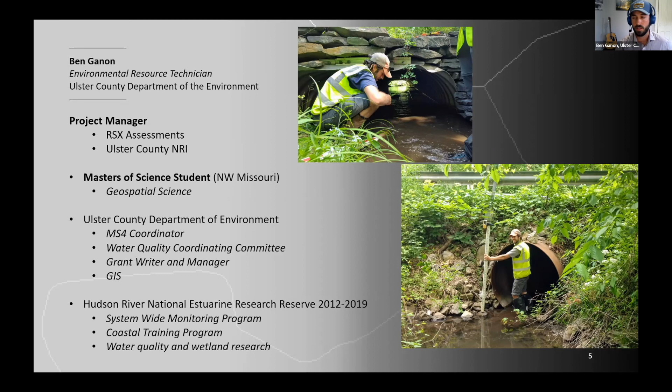I coordinate the county's MS4 program. I also co-coordinate the Water Quality Coordinating Committee. Our department is the county's water quality management agency. I write grants and manage those. I do a lot of work in GIS, and I come from a background in water quality monitoring. I did a lot of work on the Hudson River at the Hudson River National Estuarine Research Reserve.

All right, so just a quick primer on watersheds to set up the stream talk. Here we see the Rochester Creek draining into the Rondout watershed. Watersheds are defined by points, and at that point, all the area that drains to that point you could call a watershed. The watershed characteristics basically form the streams.

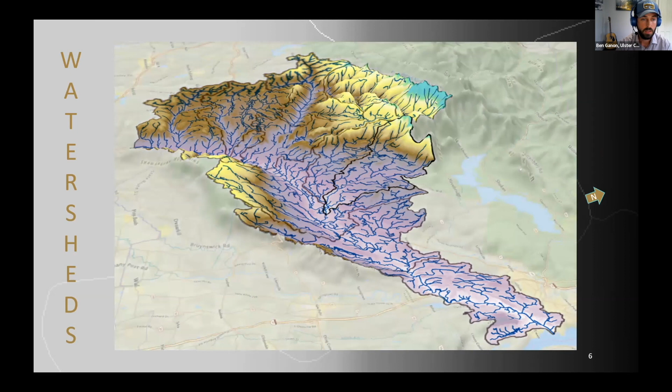Streams we like to look at as linear features. Streams are linear networks across the landscape, and as they flow, they interact with things. We can see here some streamlines on a map. We also see some roads—roads are also a very long linear network. And where they intersect, we have a road stream crossing.

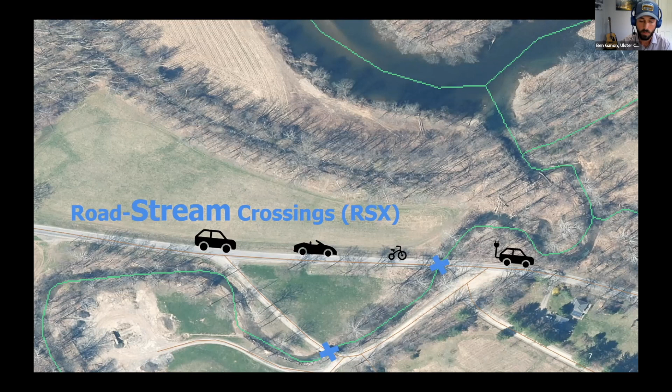They're everywhere. You're probably familiar with bridges and culverts. Before we move on, I did want to note a distinction because I also work on stormwater—there are differences between stormwater infrastructure and road stream crossings.

Stormwater infrastructure—also usually culverts, ditches, outfalls—is strictly for the purpose of channeling water away from impervious surfaces and into surface water, not streams. We get confused in the field all the time because they interact constantly, with stormwater draining into streams, and culverts everywhere, so it can be difficult figuring out what's what. I did want to make a note that we get questions all the time: if you're mapping culverts, what does that really look like?

Well, specifically for this talk and some of the projects I work on, we're talking about streams, and Tim will get into streams a little more.

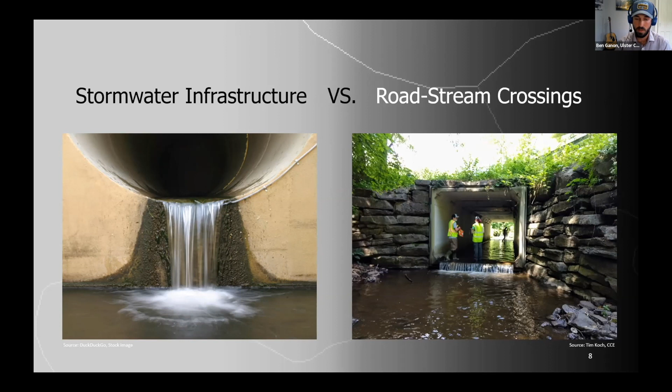All right, so road stream crossings—what's the big deal, why are they so important? Well, first of all, they're everywhere. There's an organization called NAACC, which predicts over 4,000 road stream crossings in Ulster County alone. This is a big deal because every road stream crossing can present a barrier to a stream. So picture 4,000 potential barriers to streams just in Ulster County—it paints a pretty bleak picture if everything is in bad shape.

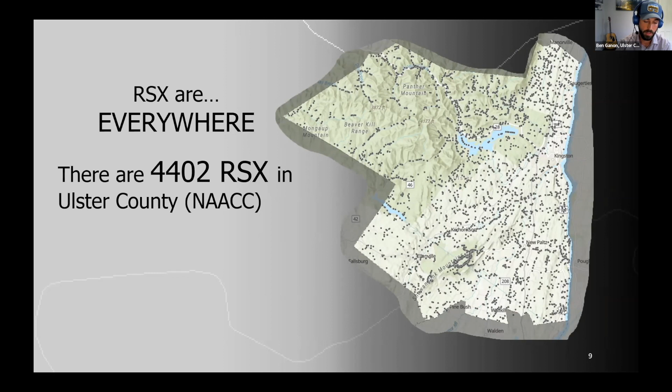So let's first talk a little bit about aquatic connectivity, which is that acronym on your screen—the North Atlantic Aquatic Connectivity Collaborative, one of the protocols Tim is going to talk about in a bit. I really like this photo because you can clearly see a stream, and the pipe in the foreground is supposed to funnel that entire stream across the road and continue it on its way. Here we see a big outlet drop, a very large scour pool, and a bunch of erosion.

I'm not going to steal Tim's thunder, but what this really does is create a big disconnect—all the upstream habitat is disconnected from the downstream habitat. That's a big deal for fish and other aquatic life, but it's also a big deal for terrestrial animals and critters that use stream banks as transportation corridors, which happens really frequently.

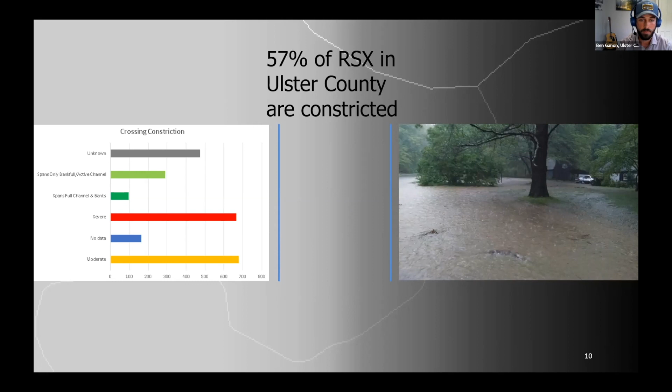Okay, so now that we know road stream crossings are everywhere, and we have a picture of why they're important for aquatic life, let's back it up a little more. Streams and road stream crossings really need to intersect, because road stream crossings are a conduit for flow, and when they're not passing water efficiently, they can serve as hydrologic plugs in the system.

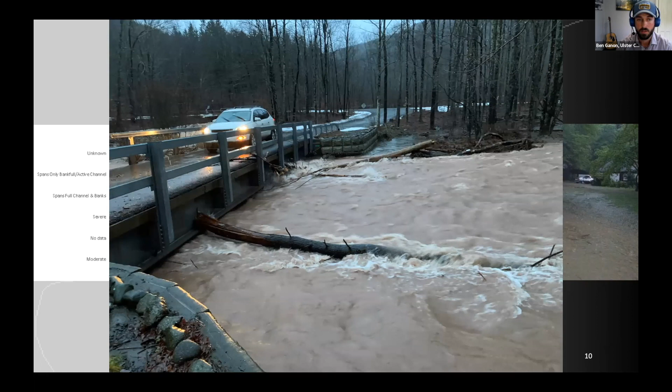You can see in this picture we have a pretty large bridge, but we can tell it's undersized. It's backwatering, which increases flooding upstream and also increases force on the structure and the road itself. This is no good because of climate change.

We're going to back up a little more before we dive into specifics, but let's talk about our changing climate—and climate change is a really complex topic.

The one relationship I want to talk about is heat and moisture. For every 1 degree Celsius increase in temperature, we see a 7% increase in water vapor availability in our atmosphere. That is the connection to larger storms in the future.

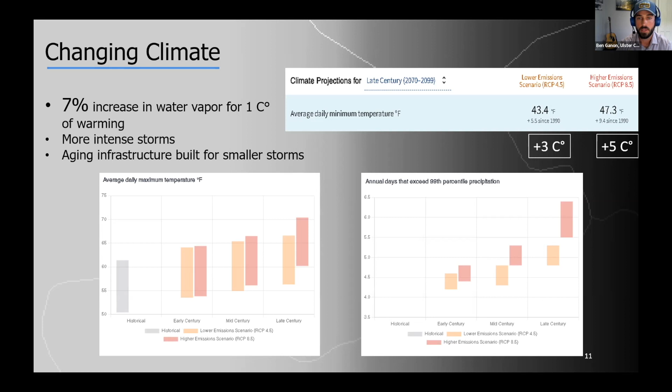When we have more intense storms, we have more rainfall, and our infrastructure is aging. It's undersized, built for storms much smaller than we typically saw in the past. This is a big deal because we're seeing the effects of climate change now, and climate change is all about pushing the extremes of what we know and what's the norm.

This is a fun graphic I pulled yesterday from some NOAA data. You can see that yesterday we had 15 million people under flood alerts, and at the same time, 114 million people experiencing drought. So we're pushing the extremes already.

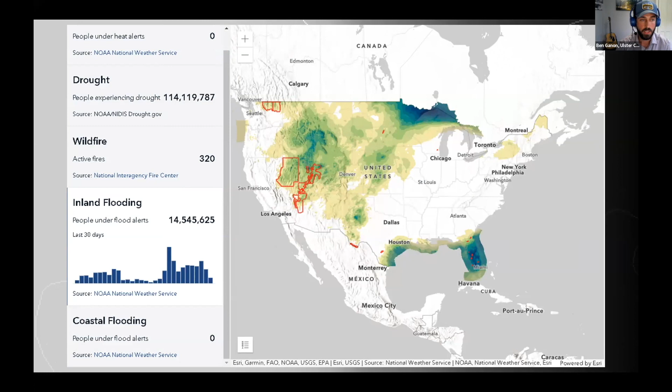When we think about our aging and undersized infrastructure combined with these more extreme climate events, we get what we all love to look at but kind of hate to see - carnage in our environment and our systems. Which is no good. It's a big threat to emergency responders, a big threat to human life, it's really disruptive, and it's bad for the environment. The list goes on and on.

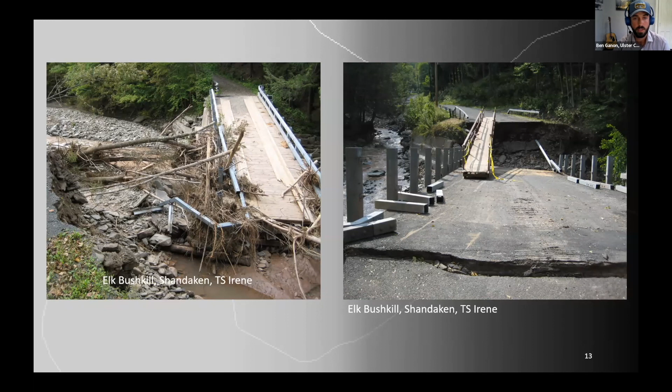This is Irene up in Shandaken. I'll go through one more example - this is up on County Route 47, just to get a sense of the scale of what we're talking about. You can see the culverts that were under that road, about 100 yards down into the woods.

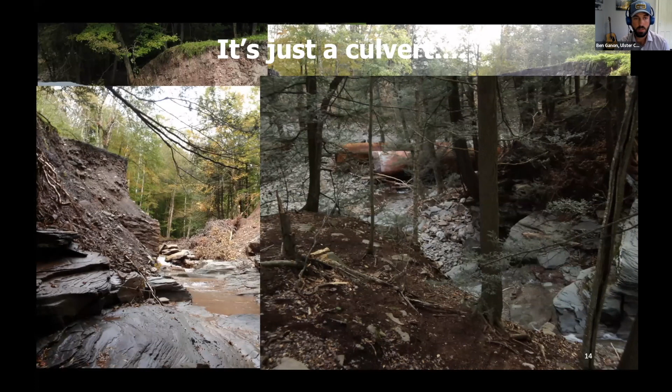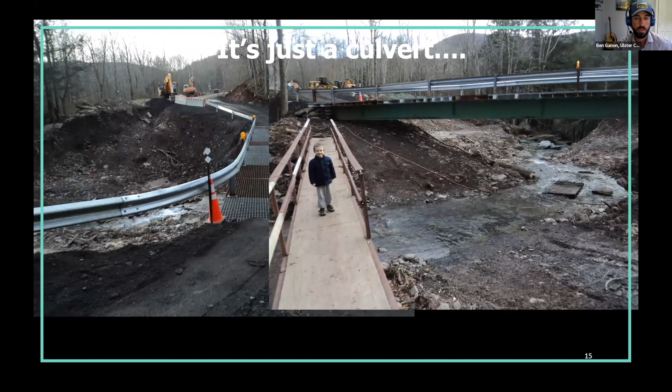It's really important for us to do this work so that moving forward, we can really begin to build and plan for future storms and the impacts we will see. This is the Cascade Brook Bridge that went in where that culvert was. You can see the impact, the size, and how well that would pass future flow.

That really gets back to my role and what we do, and what Tim does up in the watershed. At our level of work, at the county or watershed scale, we go out and try to get funding, and we go through a process where we assess and plan, and then try to design for the impacts we will see in the future.

These are the two big projects just in the last three years that I've managed. I've worked closely with Tim and a number of other partners, and we've received some good funding for these projects. But that's the overall picture I want to paint as far as importance, now and moving into the future.

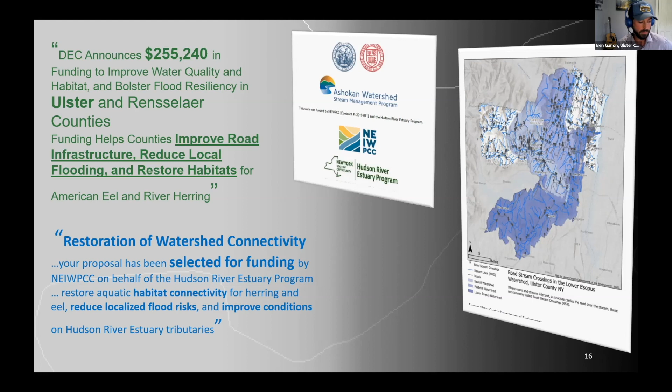I'll turn it over to Tim. Tim is the real culvert expert, so I'll let him take it from here. Bet you didn't know you could be an expert in culverts, but yeah.

Regarding some of this culvert work going on in Ulster County with Ben and the Department of Environment, my role is as a technical advisor. Ben is miles beyond me in terms of GIS capabilities, but I have a small niche, which is stream mapping and road stream crossing mapping that I've developed some methods for. So I help Ben with some of that.

The real meat of what I do is the field assessment methods, and we're going to get into some good detail on that in a little bit, and then how to take that assessment data and create scores and ultimately prioritization lists. There are 4,000 crossings in the county - where do you start?

Like Ben said, I've been doing this for a while. I did my master's research on road stream crossing mapping at SUNY ESF, did some work with the Nature Conservancy doing culvert assessments up in the Adirondacks, which was a great way to spend a year. Since 2018, I've been with the Ashokan Stream Management Program up in the New York City watershed portion of Ulster County. Since 2020, I've been working with Ben to take some of this expertise I've learned over the years and spread it throughout the county.

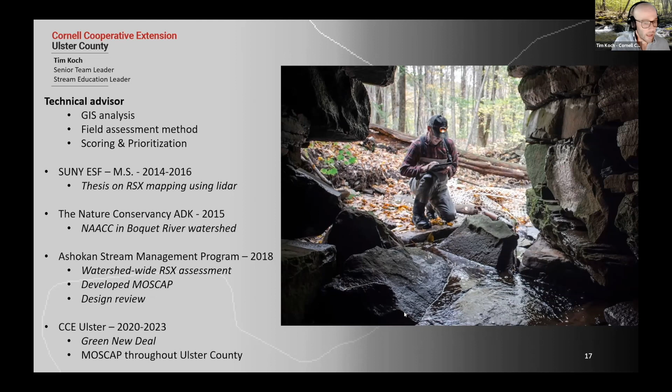And so Ben, you can go to the next slide. So this is really where I come in, is we have all of those culverts to assess. And so how do you do it? There's lots of different ways to look at culverts. There's lots of different things you could potentially measure.

So this MOSCAP is something I developed over the course of a couple of years. It was piloted up in the watershed, and then in 2020 started working with Ben. So like I said, it's sort of like this culvert management framework. There's a couple of different parts of it that start with that GIS work, like the image that Ben showed, predicting where these crossings happen. We have stream maps, we have road maps, we can kind of get a good guess as to how many crossings there are, where they are, how big they are, without ever leaving the office.

The big part of MOSCAP is once you do leave the office and you're in the field, it's a robust and holistic assessment method. So you're looking at a bunch of different aspects: aquatic organism passage, like Ben talked about; geomorphic compatibility, which we're going to talk more about in a little bit; the structural condition, so what is the physical condition of the crossing structure, whether it be a culvert or a bridge; and then this idea of flood flow capacity. So how much water can each structure pass, and is it enough? And is it enough in the face of climate change too? So we have a specific model that looks at that.

And then again, once all that data is collected, it presents a customizable prioritization framework. So depending on what your interests are and potentially where your funding is coming from, you can prioritize your culvert inventory in a way to match those objectives.

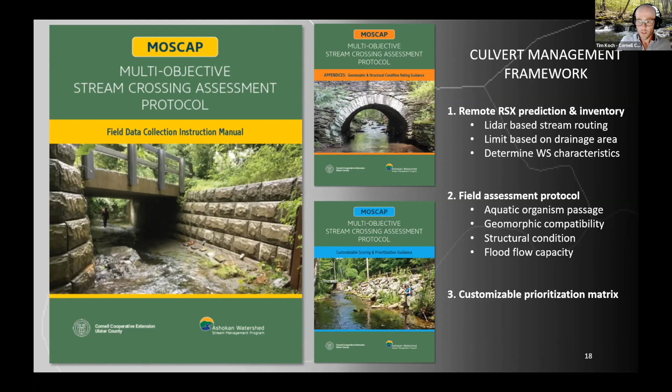All right, next slide, Ben. So the idea is that road stream crossings, it's a pipe under the road. Most, like the introduction said, most people don't think about it. Most people don't even know they're there until they fail, ultimately, which is why we show these sort of carnage pictures, because this happens, and this happens locally. So this is another one. As you can see, the Elk Bushkill up in Shandaken just got destroyed during Tropical Storm Irene.

The idea behind MOSCAP and using MOSCAP throughout the county to meet the Green New Deal objectives is that we want to create good, resilient crossings. And good, resilient crossings allow the road to function, and they allow the stream to function, and they allow both of those to function across a range of conditions: low traffic conditions, high traffic conditions, low flow conditions, high flow conditions.

So that's a nice sentence. We want to allow things to function, but what does that actually mean? So next slide, Ben.

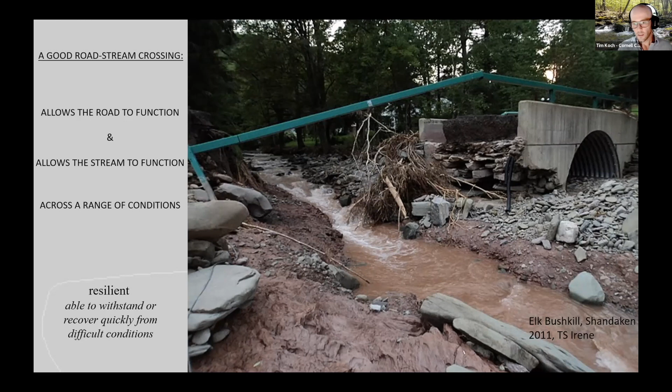What are the functions of a road? And if you think about it from the perspective of a road stream crossing, what impacts could a stream have on a road that would make it so that that road is not functioning?

You can do next, Ben. So this is kind of easy. Roads are for traveling on, they're for vehicles. But you dig a little deeper, like we've talked about, you need roads to deliver emergency services. And that's one of the responsibilities of local government, is to provide emergency services for their residents. And then also in the case of an emergency, how do you get out of danger? You take a road. So next, Ben.

So really what we expect of roads is that we want them to be functioning when we need them. And it's often when we need them, which is when they're not functioning. And that obviously creates problems. You know, up in the watershed in parts of Shandaken, people were cut off from emergency services. They literally couldn't get out. People were walking out of some of these hollows covered in mud with suitcases. And, you know, that's just unacceptable. So that's the functions of a road.

The harder question, and you can go to the next slide, Ben, is what are the functions of a stream? What do streams do? And from the perspective of a road stream crossing, what could a road do to a stream that makes it so it doesn't function? And so I do want to ask the audience, you can unmute yourself or you can chat, but can anyone give me an example of what streams do, what functions they do, and what we expect of them? Does anyone have any ideas?

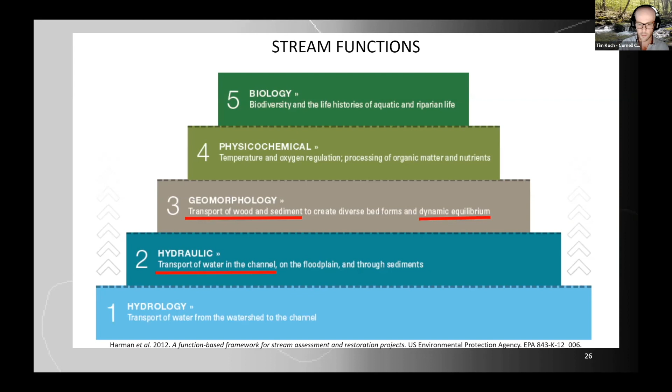If you think back to your high school earth science class, which I hope everybody took, you may have learned that streams are always changing. They're changing location. Maybe you've seen some of those maps of the Mississippi River as to how it's changed courses over the last couple thousand years. So streams are changing, but they're also in a state of equilibrium - they're eroding and depositing, doing all this stuff at the same time. A good resilient crossing is one that accommodates that. This is the expertise I've gained over the years doing this, the intersection of geomorphology and road stream crossings and dynamic equilibrium.

That study, the study of how streams interact with the landscape, is called fluvial geomorphology. Fluvial just meaning moving water, a Latin word for moving water, and then geomorphology, the shape of the landscape. So how streams affect the shape of the landscape.

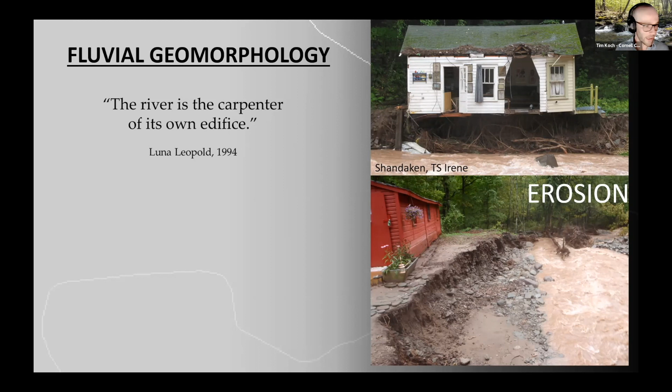There was a very famous fluvial geomorphologist who was the son of Aldo Leopold. I don't know if anyone read Sand County Almanac by Aldo Leopold, a great environmental classic book. His son, Luna, was a pioneering geomorphologist and a really awesome looking guy, kind of a stream cowboy. He had this quote that the river is the carpenter of its own edifice. So if people disappeared from the earth tomorrow, streams are going to continue doing their thing, transporting sediment, shaping themselves. So humans, in some sense, have zero effect on what a stream is going to do.

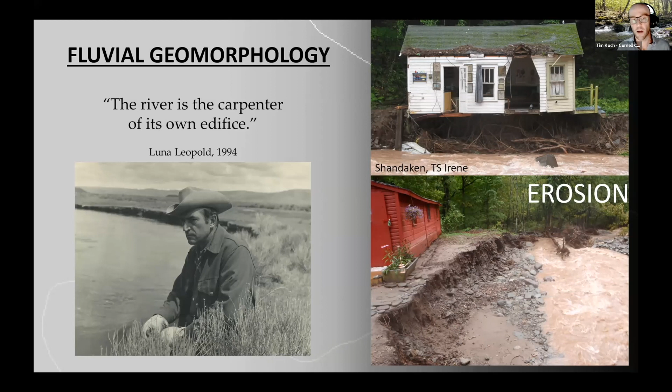And the way a stream shapes itself is primarily through two processes, one being erosion, which you can see some extreme examples of here, again, from Tropical Storm Irene. And the other main process is deposition. If anyone's ever been in an area after a bad flood, what you notice is that there's rocks, mud and sediment everywhere. It really gives you a clear picture of sediment transport and that geomorphic function of streams, and how important and devastating it can be if it's not accounted for.

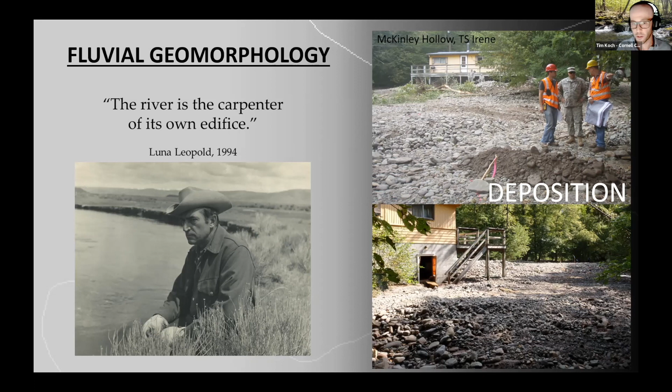And then there's that phrase dynamic equilibrium. These processes, deposition and erosion, are all kind of happening at the same time. In a stable stream system, those two processes are in balance. So that's how you can have it be dynamic - things are changing, there's erosion, there's deposition, yet also be in equilibrium. Where there's erosion, it's equally counterbalanced by deposition somewhere else. That's how you get a stable stream.

We have this sort of very conceptual, simplified model of what dynamic equilibrium is, where you have this relationship between water and sediment. It's this very finely tuned scale that a stream, if given infinite time and infinite space, will eventually stabilize itself.

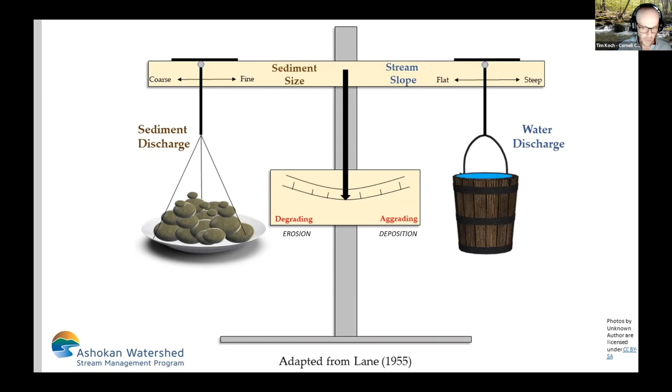Now, if something changes - if the climate changes, if land use changes, if over geologic time there's geologic uplift and the stream slope changes - things start to happen.

So say, for instance, we start to get a warmer, wetter climate, which is kind of what we're expecting in this area. That tips the scale and pulls the water side down, and we get what's called degradation of the stream, or an imbalance in favor of erosion. We're no longer balanced between erosion and deposition - we're getting more erosion than deposition. That's kind of what we're seeing with this massive stream bank erosion, down cutting or incision of channels, which is when the stream bed erodes and starts to drop.

On the other side, you can get what's called aggradation. So you have too much sediment, not enough water, which can happen when you have a huge failing hill slope that's just pouring sediment into the stream. All of a sudden the stream doesn't have enough power to move it, and you get aggradation, and there's a slew of impacts that come from that.

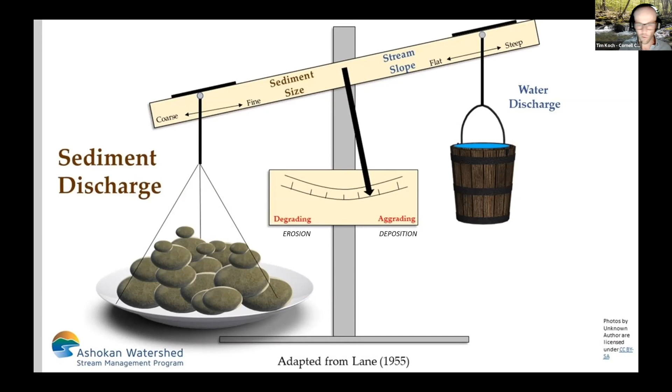So that's sort of a streams 101 kind of discussion. Going back to MOSCAP and this idea of looking at culverts and bridges holistically, where yes, we've got aquatic organism passage - aquatic habitat fragmentation is a really important thing, especially in Ulster County, where ecotourism is a real driving economic factor.

We have the flood flow capacity - if you remember the bottom of that functional triangle, are these crossings sized for the size floods that we expect to see? There's obviously the structural condition, is the concrete crumbling. But what's kind of unique about MOSCAP is this geomorphic compatibility module. That's going out into the field, looking at the river, thinking about those river functions, and looking for specific manifestations of those processes, which can get kind of difficult.

But this is really like my bread and butter. This is the stuff that I love to do. So part of the way that we do this, we'll go through some examples. Like I said, we have those primary processes of erosion and deposition. So in a MOSCAP assessment, one of the things that we measure qualitatively is erosion.

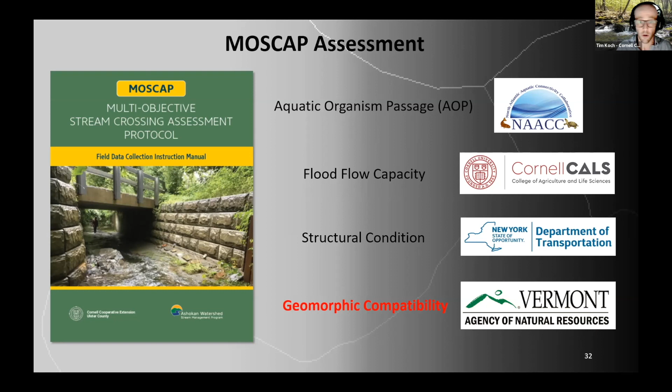But it's not only whether or not there's erosion happening, it's the degree of erosion, it's the context - are we upstream of a crossing? Are we downstream of a crossing? Are we on the outside of a meander bend where we'd expect to see natural erosion? Or are we somewhere where we wouldn't expect to see natural erosion? So there's a lot of context that needs to be thought of when we're going out and doing these assessments.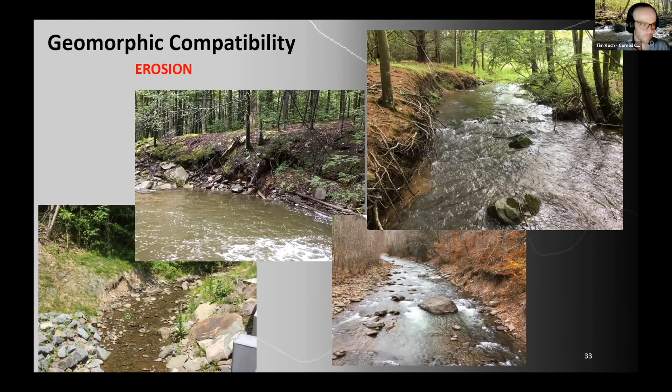The counterpoint to erosion is deposition. So are we seeing signs of excessive sediment deposition, which is telling us that the scale is out of balance? Believe it or not, there's half a dozen different types of deposition, and depending on the type you're seeing, it can give you context - what is the river telling you? What's going on here? Again, are we on the inside of a meander bend where we'd expect to see that point bar deposition?

And then how much deposition? Are we getting these huge bars inside of a culvert? Because if we are, we're reducing the hydraulic capacity of that structure. The structure fills in with sediment. The next time we get a flood, there's not going to be any space for water. Where's the water going to go? Over top of the road.

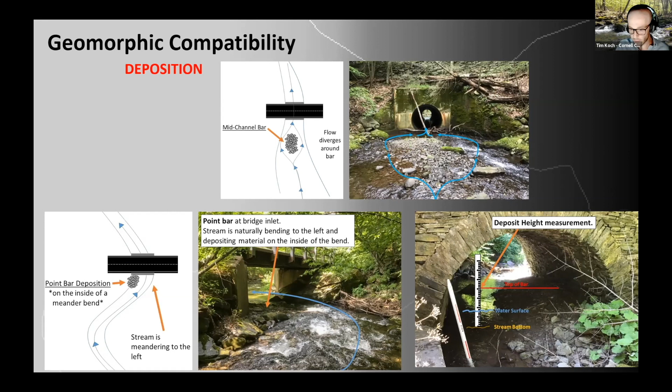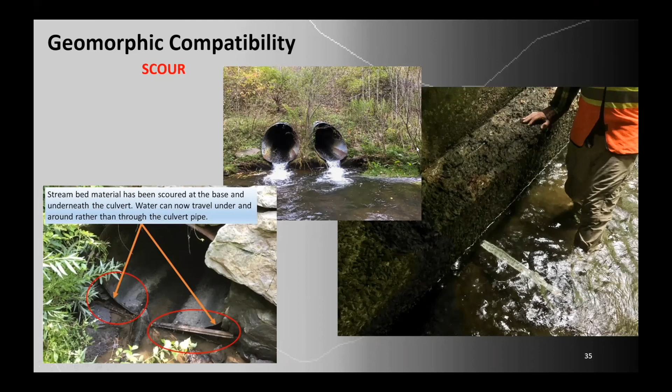And then we have ones that come in, I've seen some that literally come in at a 90-degree angle. If there's something you should know about water, it's that it doesn't want to go at 90-degree angles. Generally we have this threshold of 45 degrees. If the stream is coming in at an angle greater than 45 degrees, that's a really bad sign. It's just not setting either the road or the stream up for success.

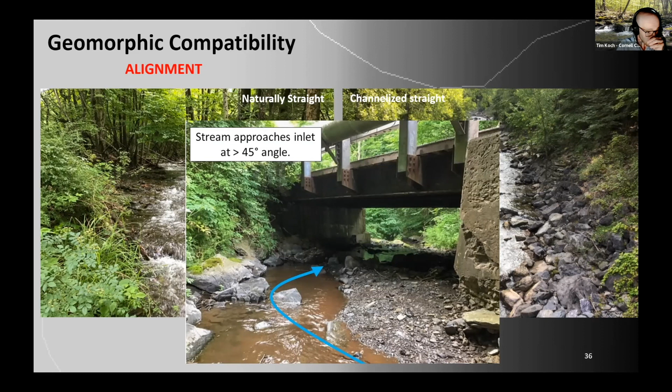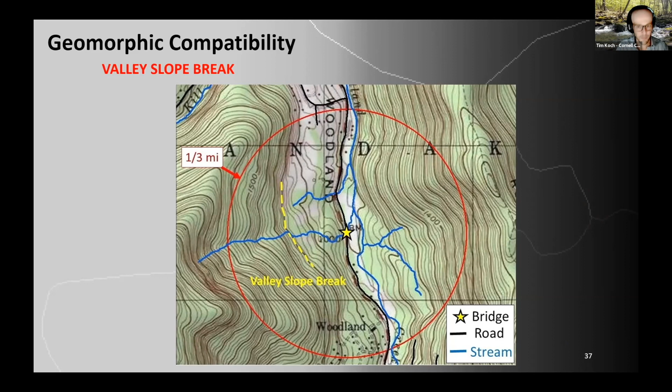So these are some of the things that we look at. This is really what I like to do, and it gets very technical. It requires a trained and calibrated eye. That's one of the things I do and really enjoy, we host trainings on this NAACC procedure. They usually take about a week, because we have classroom sessions and then go out in the field to find structures that run the whole range, both in terms of road function and stream function.

So this past year, we held a pretty large training in 2022, and we had representatives from DEC, the New York State Department of Transportation, New York City Department of Environmental Protection, and Soil and Water Conservation Districts.

Back in 2020, I trained Ben in this protocol, and some Department of Environment staff surveyed 360 crossings using this procedure, something like that.

And then up in the Ashokan, we've used this process for over 600 crossings. So at this point in Ulster County, we've used this NAACC, this holistic assessment method, for over 1,000 of those 4,000 crossings. It's really exciting, and it's unique in that way. Ulster County really has higher quality data than most of the rest of the state, if not the country, in terms of their culverts and how it affects management.

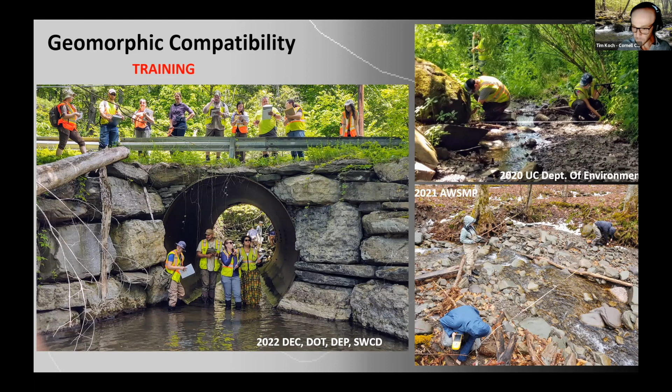Next slide, Ben. So we collect all this data. We have these different assessment objectives. That third part of the NAACC is, okay, what do we do with that data? How do we make it useful?

And the way that we do that, there's a whole book about it if you want to dig into it, but it's very customizable. So ultimately what you end up with is 4 assessment objectives: aquatic organism passage, geomorphic compatibility, structural condition, and flood flow capacity.

What you then do is take those 4 objectives and say, okay, which one's most important to me? Is it aquatic? If I'm someone from Trout Unlimited, maybe I'd say aquatic organism passage is my primary objective. If I'm a highway superintendent, structural condition and flood capacity are going to be my primary things. Up in the watershed where we have this concern about turbidity and fine sediment, geomorphic compatibility is the biggest issue. So one of the really neat things about NAACC is this customization ability to change those scores.

You basically just punch in your scores and then it gives you a prioritized list. You get a numeric score and then it also bins it into these different categories.

What's neat about the upcoming project that I think Ben is going to talk more about is this customization extends beyond these 4 assessment objectives, and we can put in other important factors that we want to integrate into that score. So things like road criticality, how many people are going to be cut off if this road becomes impassable.

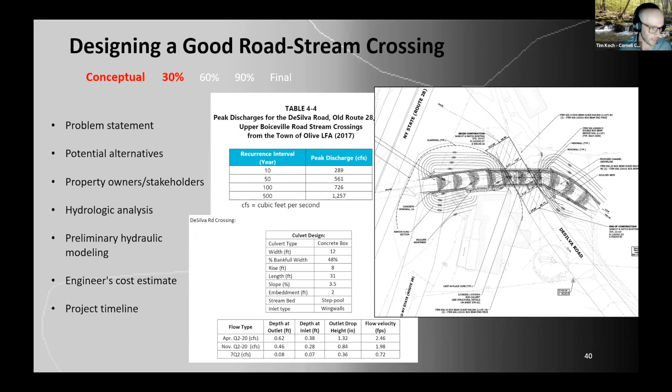Oh, no, sorry. So this conceptual stage is really when you can try to integrate what's called best management practices. So what would the ideal replacement crossing look like? Ideally, what most people are pushing for nowadays is to have a structure that has a natural stream bottom. Clearly, it's going to be better for fish. It's going to be better for macroinvertebrates that the fish eat. And it just makes it a more natural system if you have that natural stream bottom rather than a plastic pipe or a concrete box.

If you can't have an open bottom, it's best to embed that structure with native stream bed material. We want to make sure the structure is wide enough. This 1.25 bankfull channel width is a DEC recommended guideline. So, ultimately, the best management practice is to have the stream still look like a stream as it goes through the crossing. And this is a pretty good example here from a structure we did in Olive on Upper Boiceville Road, where inside the structure, the stream looks an awful lot like it does upstream. That's a good crossing. So at this conceptual stage is really when we try to hit these target objectives as much as possible. So next slide.

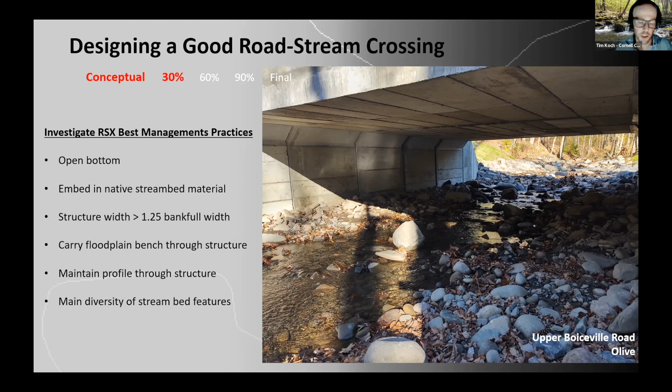So the 60% design, again, we touch base with the engineer. We've typically settled on a preferred alternative, an open bottom culvert or a concrete box culvert, whatever it is. We've decided on that. There's more intensive, more specific modeling that's done. The engineer typically starts to do this earthwork analysis, how much grading needs to be done, cut, fill, what's the construction sequencing, what are the permits that are required, and then let's put this out to bid, holding to whatever procurement guidelines the municipality might have. And then a revegetation plan. Vegetation is super important on these sites as they recover from ultimately what's a surgery. I like to think of culvert replacement as a surgery, and it's an invasive surgery. So planting really helps to recover after that.

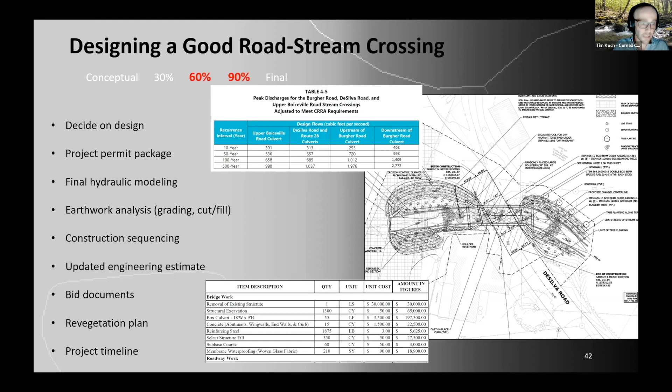Next slide, and then we get to the final design. So this is what the construction firm uses to actually build the project. Then it goes out to bid for construction. And so that's typically how we have done design up in the watershed, and we've had good effects.

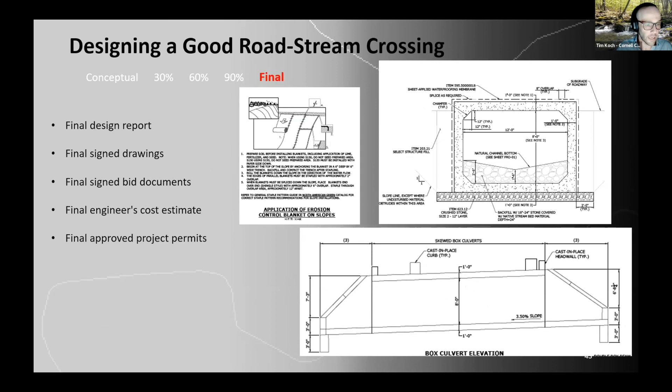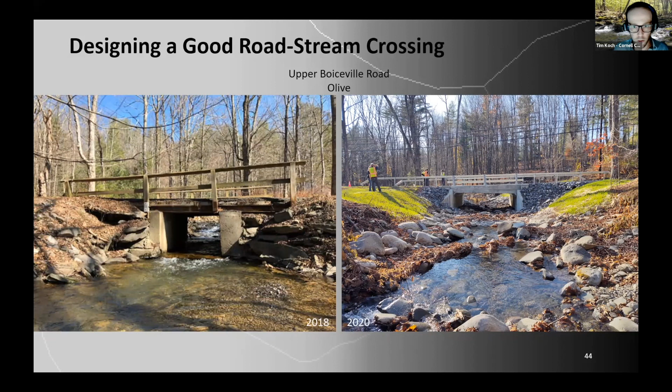Next slide. So the sticking point really is, how do we get from assessment to assembly? And that's what everyone is trying to figure out at the moment. You may have heard that there's a big infrastructure bill that was passed at the federal level. So this isn't only an Ulster County issue, it's a national issue. We have aging infrastructure and we have climate change. And every county in the country has thousands of crossings. So this is really starting to get attention, and it's starting to get the financial support that it needs to provide a benefit to communities. So, some of you might be thinking that 30, 60, 90 review, oh, well, that's going to increase costs. Absolutely right.

But as anyone that's planned a family budget, or any type of program budget knows, sometimes an increase in upfront costs is made up for in long-term savings. It's a hard political point to sell, especially when you're talking about municipalities with limited budgets, but something that we ultimately push for and that we're getting the data to back up.

Another thing we've run into, especially in the towns of Shandaken and a little bit of Olive, is when you get some of these grants, like from Bridge New York and other state and federal grant programs, the administrative burden that it puts on communities is just out of this world. The amount of paperwork and procurement stuff you have to go through has really been a barrier to improving road stream crossings.

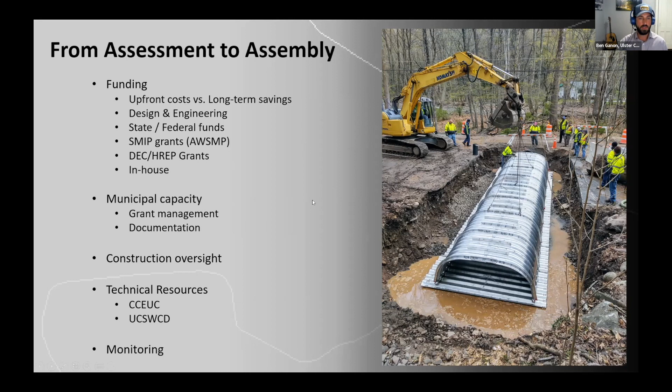So continuing this discussion, we've heard a lot about road stream crossings, a lot of technical information about why they're important, and we're finishing with: they are expensive to replace. But backing up, we have all of those steps we've talked about - the assessment, the planning and the design - before we really need to go out for funding. So I want to talk a little bit about the planning step.

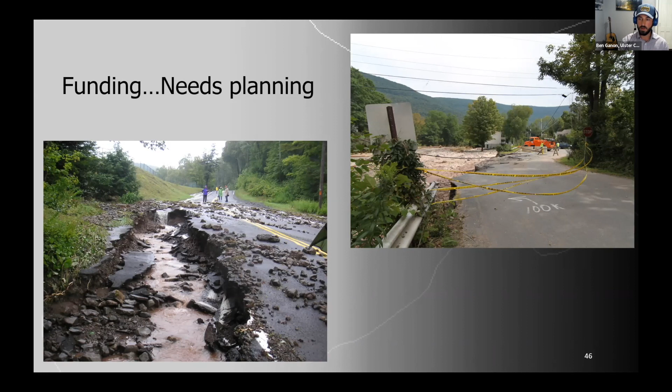Tim and I were talking, and he had a great line - when plans converge, that's when you get really great funding opportunities. So when we go out and do our assessment work, say we do design work, we prioritize these projects. If we can document those projects in multiple plans, that serves as a great foundation, and some really great funding opportunities can come from those. So that's kind of where we're headed in a lot of this work.

And so I'll wrap up with a shameless plug on some of the projects we have going on at the county level that can really help municipalities and other groups push for these replacement projects. The first and probably most relevant one is the county's hazard mitigation plan, which is currently going through an update, and municipalities can elect to participate in this.

The assessment work that we do really just tees projects up for inclusion. And if your municipality is in the hazard mitigation plan with a specific road stream crossing as a priority, you open yourselves up to tons of state and federal funding and emergency funding when storms happen. So as you're working with your municipalities, definitely encourage participation, and if you want more information, get in touch - some of my colleagues work very closely on this project.

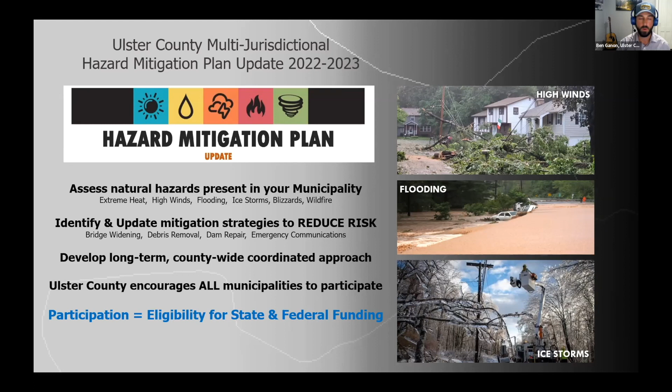Another extremely relevant one - I wanted to talk about our upcoming project. We were recently awarded funding from NEIWPCC and New York State DEC to keep going on this work. So we're focusing on finishing the municipalities in the lower Esopus watershed, and at the conclusion of the project, all of the lower Esopus towns will have 100% NAACC assessment coverage.

But the real kicker here is that at the end of this project, we're going to have a countywide road stream crossing mapper. So as we go out and assess crossings, the mapper will just score them for us, and this will be publicly accessible and hopefully a really great point for engaging with the towns, watershed groups, ECCs, and CACs.

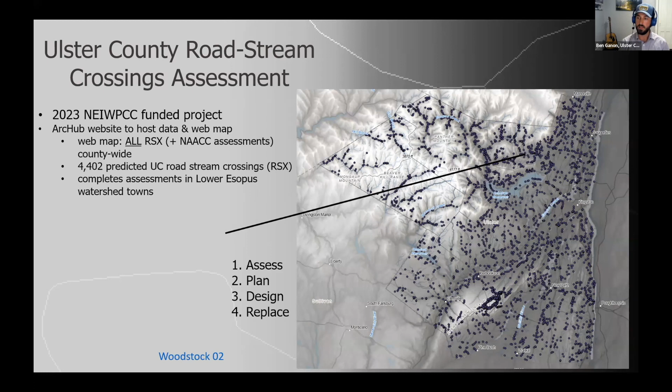So this Woodstock 2 site is a really good example of this process where we assess, plan, design, and replace, because we found this was a priority during our 2020 assessment work. We wrote about it in a plan and ended up with final engineering designs. It's being replaced next year, which is going to be a really exciting project. It's currently in the county's capital budget, but we're trying to get additional money for it.

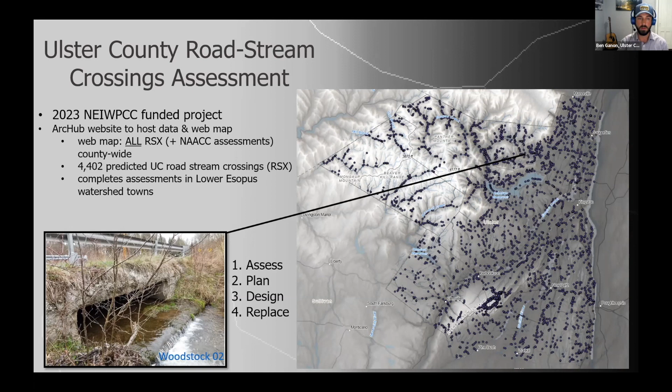I'll fly through these. Tim mentioned transportation criticality. This project is being managed by our planning department, looking at our transportation network and determining vulnerable segments, essential facilities, population density, evacuation routes, transit corridors, etc. This will also be a web map, publicly accessible, and it really shapes our priorities for assessment work on road stream crossings, since they're a big component of our transportation system.

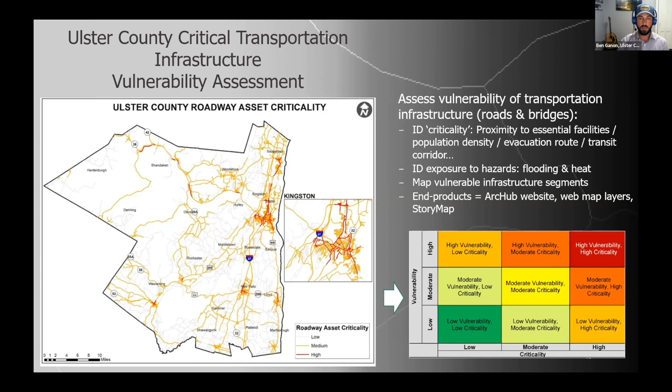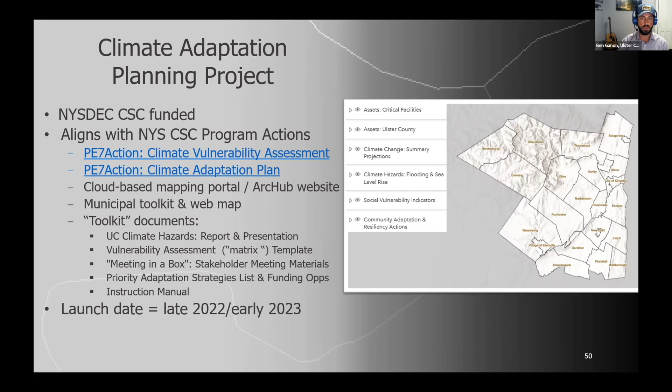And the last one, another shameless plug - this is my project, I'm working on the county's Natural Resource Inventory. Once we get our road stream crossing mapper, we'll have a great road stream crossing layer in the NRI, because that's the intersect between human culture and our natural water systems. Looking forward to continuing on that. We'll have a lot of public engagement, presentations to the Environmental Management Council, the Climate Smart Committee, a couple public workshops, and then a municipal training session at the end.

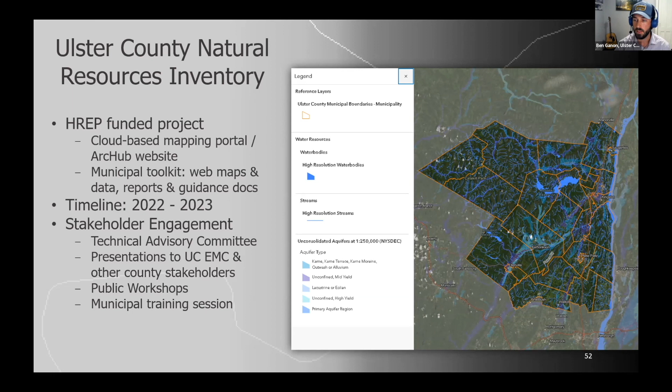Yeah, it seems like a lot of people are talking about this bridge in Accord. Are you guys familiar with that one? Over the Mombaccus, yeah, that's huge. Everybody calls it the Skyway or something. Any ideas why it's so big and high?

So Tim, I know a little bit about this project. This is where 209 was elevated right outside of Accord. I don't know if you've driven down there recently, but the crossing used to flood all the time. 209 went up maybe 20 or 30 feet, and it also crosses over the Mombaccus Creek. Actually, Tim, this would be a great site for you to check out, because I think upstream and downstream there's tremendous buildup of woody material now, and a lot of changes to the stream.